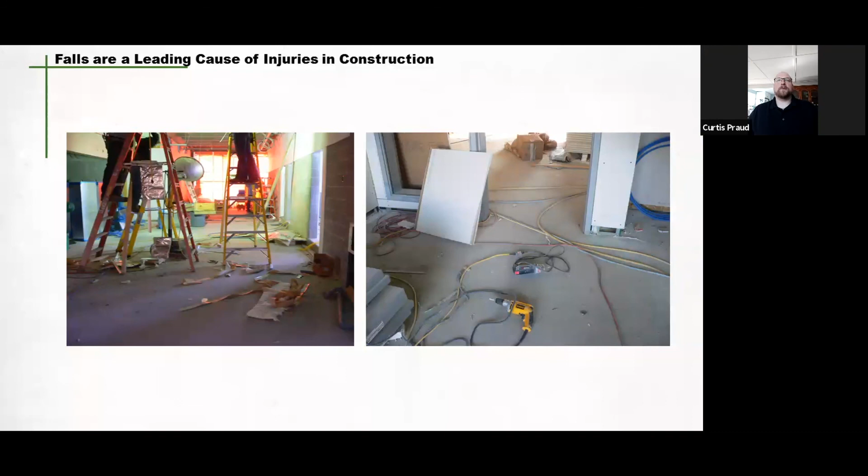So falls from the same level, I touched on that a little bit earlier, and that results from poor housekeeping, holes in the ground, slips and trips. So when we look at that, housekeeping is a big factor. But when we look at falls from heights in the residential industry, without the proper controls in place, they can cause serious injury or even death.

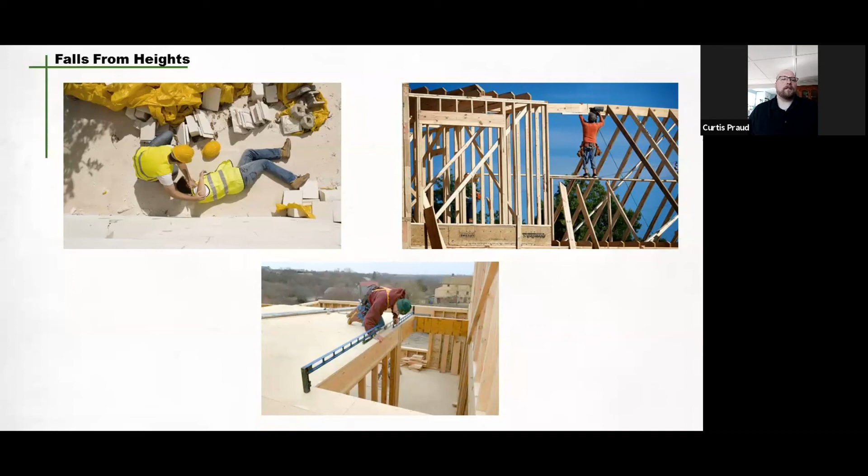So the key part of maintaining workplace safety is understanding what areas pose these risks. So when we look at that, we look at unguarded edges, rooftops, openings in floors, working off ladders. Those are just some examples of working at heights and having those fall hazards. So when we look at that, we want to address that.

So like I said, falls from the ground level, we can look at that as uncapped rebar or nails sticking out of boards and other similar protruding items that can cause injury. Good housekeeping on the site is very important for this reason. The job cleanup phase takes about 5 to 10 minutes throughout the day.

So if you shut your crews down a little bit earlier and give them that time to clean up, you're eliminating quite a few hazards on that job site alone. So it's such an easy task to do to eliminate the risk of your employees getting hurt. It just kind of pays for itself in the end, really.

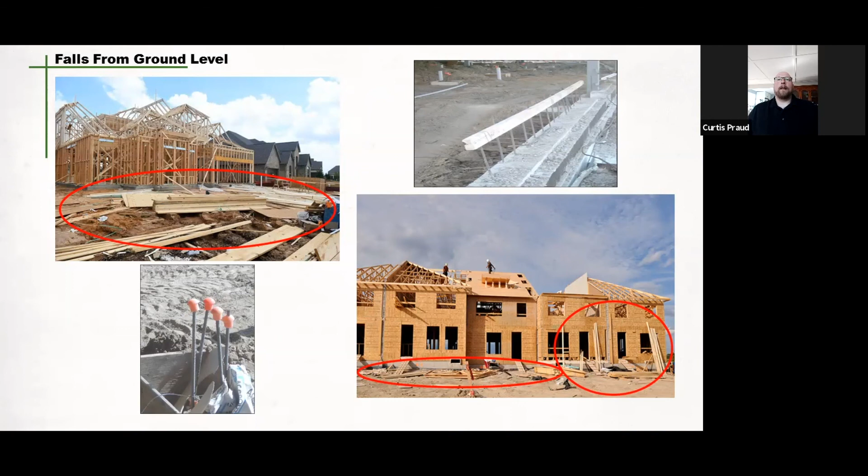And then from there, we move into the hazard assessment process. So most companies are conducting hazard assessments typically on a daily basis, but that'll be determined by your activities at work. So by contacting an advisor, we can help you with that process.

All workers must know the hazards present on the job site, as well as how they can be controlled to keep themselves safe. All hazards or situations that can lead to falls must be assessed and controlled. As with all hazards, fall protection must start by considering the ways of elimination to reduce the risk of falls.

So from there, we move into the hierarchy of controls. So first and foremost, if you have a hazard on site, the best way to control that hazard is by elimination. So just taking that hazard completely out of the picture. From there, you're moving into substitution. And substitution, that's where you're replacing the hazard with something less hazardous, if you can do so.

Next is engineering controls. The hazard's not eliminated, but the risk is reduced by isolating the workers from the hazard. Okay. And then we move into administrative. That's where you're taking stuff into play, like your work practices, your safe job procedures, your training, and changing the way the work is done.

Okay. And then of course, your last line of defense is your personal protective equipment, your PPE. So that should be your last line of defense. Not only that, your PPE can be used in conjunction with other methods of the hierarchy of control.

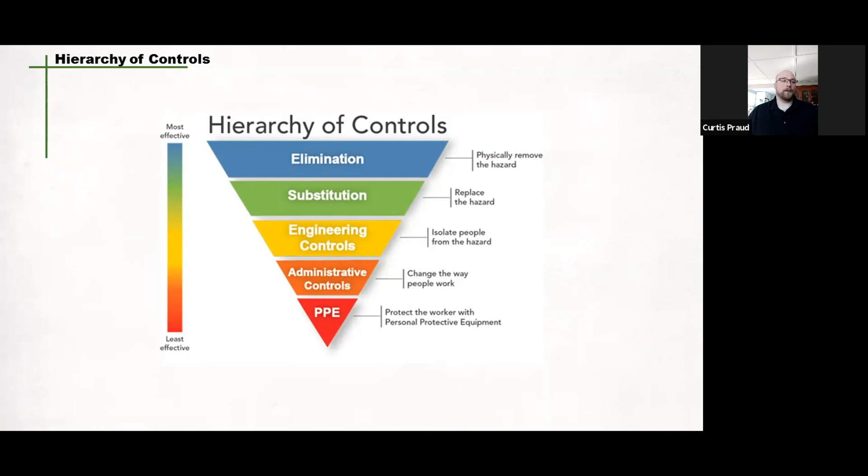So with the hierarchy of control, obviously elimination is the main one. But when we move down the ladder a little bit, we look at the elimination phase and reducing the risk of falls while trying to install them at heights. Okay, so like this, a lot of companies are moving into building the roofs on the ground, eliminating that fall hazard altogether, hiring a crane, and then they crane that roof into place.

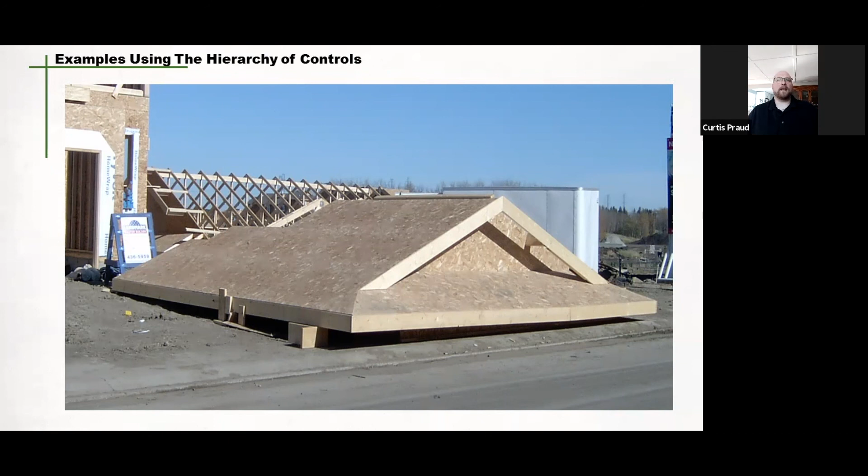Now, with that, you are introducing new hazards, but they're easily controllable with control zones around the site, proper spotters, having that person trained in rigging and stuff like that. How to do that job safely comes down to training. So ultimately, like I said, reducing and eliminating is the key factor of the hierarchy of control.

So the engineered controls, this is a broad category in residential construction. There's so many different methods that companies can use when it comes to engineered controls. Some of these examples are the guardrail systems to protect workers from falling from heights, hole coverings, temporary handrails on stairwells, fencing around the job sites to protect the public, like you can see in some of these pictures.

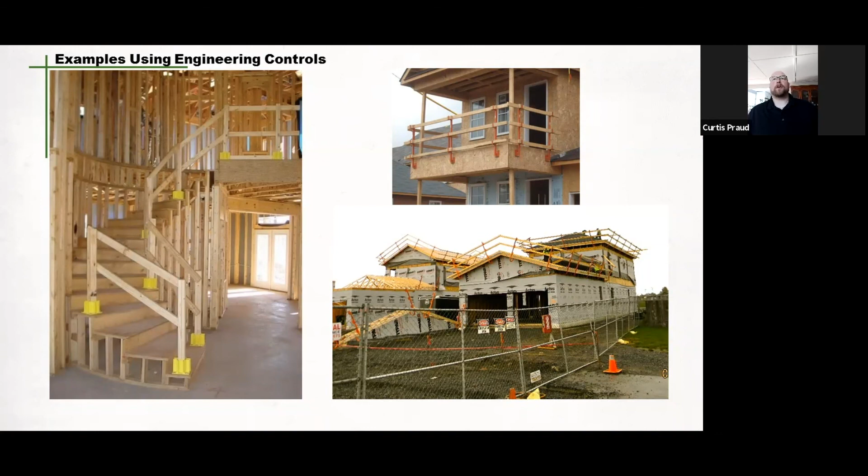There's so many different methods that we can use when we look at the engineered control factor. And with those examples, it's a task-specific control you're going to put in place. They're not all going to work together. So some more examples of engineered controls. A lot of the times we hear, well, how am I going to tie off to the rafters when I'm standing them? If they fall over, I'm going to go with it. So there's so many different methods out there. And please contact the SCSA if you'd like some more help with this.

But one of the avenues you can use when standing rafters and things like that is the wall walking scaffolds. These brackets are attached to either the inside or the outside of the walls and give the framer or contractor the ability to place and stand trusses from a safe platform.

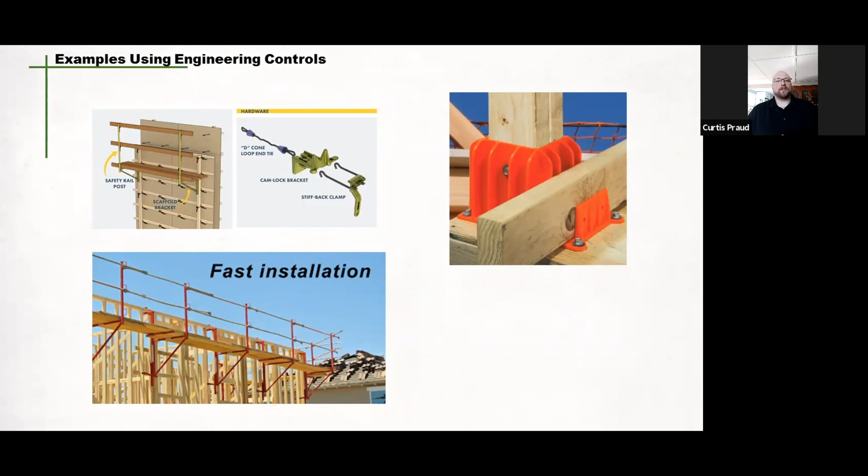So as you can see from that picture there, you can actually hang these brackets on the outside of the wall. It gives you a safe working platform, as well as your handrail and toe kick to be put in place. So they are commercially available. You can also get the guardrail boots. These are a small little plastic piece you can bolt to the floor, and they give you the ability to place a toe board in there, as well as your handrail to be put on.

Also, some other things to consider are your hole coverings, barricades for open holes, to protect the workers from falls. The hole covering is required to be able to support 360 kilograms per square meter. It must be properly secured and marked with a warning sign. Building shafts must also be covered with a 2-meter high solid barrier and clearly marked.

So when you look at building shafts, that's your elevators and your conveyor belt shafts and stuff like that. Those things must be covered, not with just a handrail, but a full 2-meter high covering, plywood, and then secured properly. Put in place.

Now we'll look at a few different pieces of equipment when it comes to ladders and scaffolding on site. So ladders are kind of the most common thing you're going to see on construction sites. There's a few different types of ladders that you will see. You're going to see extension ladders, step ladders, and construction ladders.

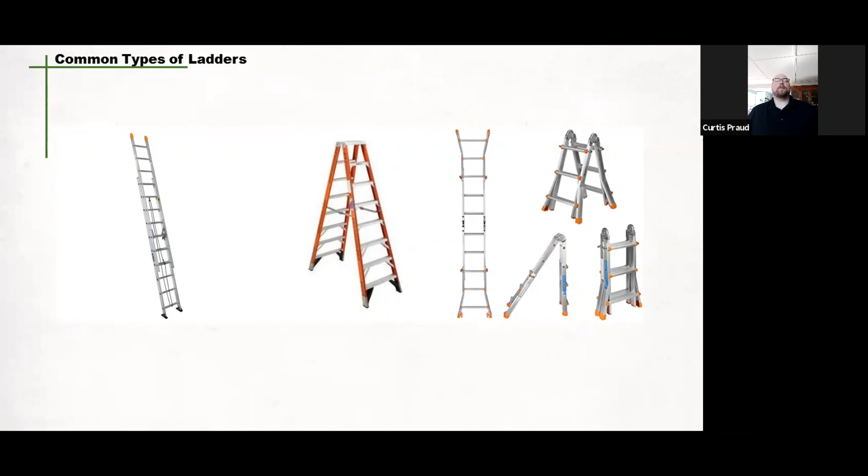Okay, a construction ladder means a ladder that is built on a work site. There are very special requirements on their design and construction in the regulations. So if you are building a construction ladder, make sure you're referring to your legislative requirements, as well as how to set that up. Setting up a step ladder is very crucial in ensuring workers are capable of using them safely.

Okay, so a few helpful tips when setting up extension ladders. Inspect your ladder before setting it up. Look for any bends, loose rivets, safety decals that might be missing or worn off, and make sure the feet are planted and secured on the ground properly. Extension ladders should also be set up at a 4-to-1 slope. So 1 foot from the wall for every 4 foot of ladder, as you can see on the diagram here, and it must be 3 feet above the top landing that you're going to be accessing from that ladder.

Ladders must be secured against accidental movement. The best practice is to tie the ladder off securely at the top and bottom of the ladder, and also refer to manufacturer's specifications for the specific design of that ladder. Are there any electrical hazards? If there are, avoid using the ladder in that area. Try and relocate that ladder to a safer location as means of access.

Are you blocking any doorways? Okay, so never set a ladder up in a doorway. If it's set up in the doorway, somebody flings that door open, they're going to hit that ladder, and you're going to take a tumble from a height. So a 2-section extension ladder must have 3 foot of overlap, so it cannot fold inwards. That's very important, having that 3 foot of overlap on those extension ladders.

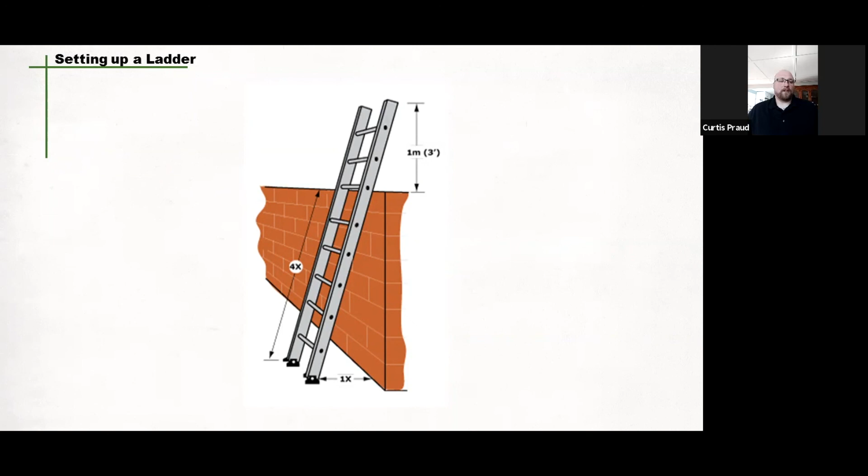Being a big guy like I am, I need to look at that stuff. I can't just grab a little tiny step ladder and use it. I got to make sure that that ladder is going to support my weight. I am a journeyman scaffolder by trade, so I learned this throughout my career in scaffolding, and weight restrictions were very important. I had to be conscious about that. Nothing to be ashamed of. You must do it. Your life is in your hands at that point when it comes to fall protection.

So moving a little bit more on ladder safety, there are several practices that make ascending, descending, and working off them safe, okay? Ensure that 3 points of contact are maintained at all times while climbing up and down that ladder.

While working off a portable step ladder, ensure that you're standing no higher than the last two rungs, okay? So ideally the third last step on that ladder is as high as you can go. With that, if you are using your hands for working, keep your torso in line with the ladder. If your belly button's touching the ladder and you rest your hips on that ladder, your hips are now considered your third point of contact, giving you the ability to use your hands while working. But like I said, keep yourself within the parameters of your ladder.

Carrying tools and supplies up the ladder will prevent you from maintaining 3 points of contact. So when you do have to carry stuff up a ladder, don't. Utilize a rope and a bucket. Have people in place that can help you do this stuff properly and safely. Do not carry stuff up the ladder in any way possible.

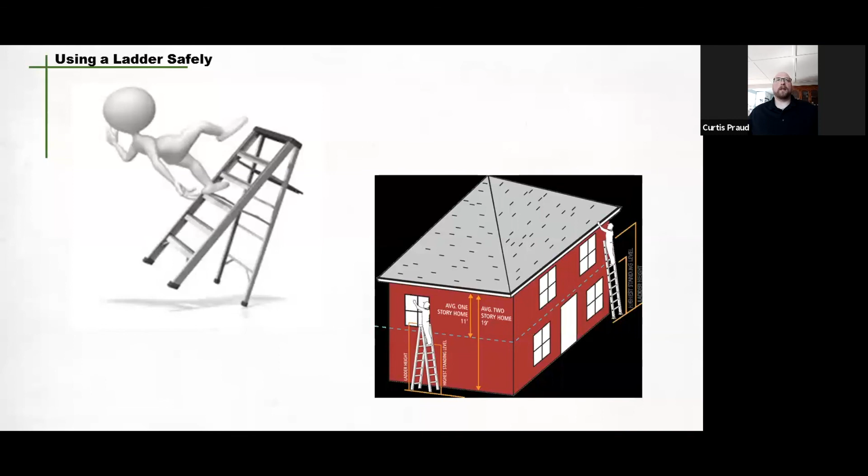And do not use a folding step ladder in place of an extension ladder. This is something we see all the time on residential construction sites, where they'll take a folding ladder and set it up outside the house. It is not designed to do that. Those legs can kick out from underneath you, sending you falling to the ground. So again, placing and choosing the proper ladder for the task is key.

So moving into scaffolds, scaffolding is a huge aspect of residential construction. This stuff is amazing. It speeds up the process for a lot of contractors. But understanding your scaffolding and how to use it is crucial. There is training that should be taken before using scaffolding, as well as referring to the manufacturer's specifications on how to set this stuff up.

A few different types of scaffolds that you can potentially see on residential construction sites are your frame scaffolding, which is the blue ones in the picture. Then you move into system scaffolding, which is the top right scaffold. And the bottom right scaffold is tube and clamp scaffolding. They're very common in residential construction, as well as pump jack scaffolding. A lot of times siders and contractors installing windows and stuff will utilize pump jack scaffolding as well.

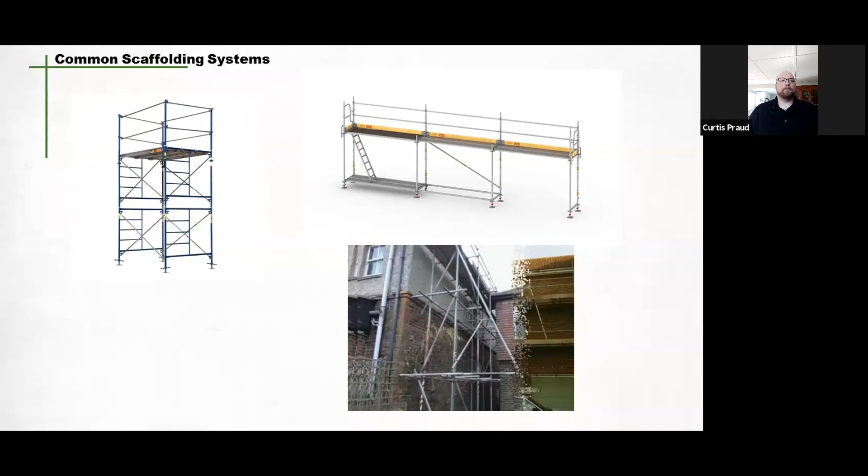Although scaffolding is very common on residential sites, there are risks associated with them all, okay? So just to discuss a few requirements, scaffolding needs to be erected by a qualified, competent person, and it also needs to be inspected daily. Like most common equipment, scaffolding has weight limits, okay? Weight limits for people, material and the equipment on it. The specifics of the system must be adhered to. So whatever the manufacturer specification states, you must stay within those guidelines, as well as referring to your legislative requirements.

One example is when a scaffold is covered in hoarding, an employer or contractor should ensure that all scaffold components and tie-ins are adequate to support the load that may be placed on the scaffold as a result of wind or weather conditions. A lot of people don't know that. They just wrap a scaffold in hoarding and they don't tie it in at any points. You've now just created a big kite of scaffolding. And as you can see in these pictures, that's a good possibility of what happened here.

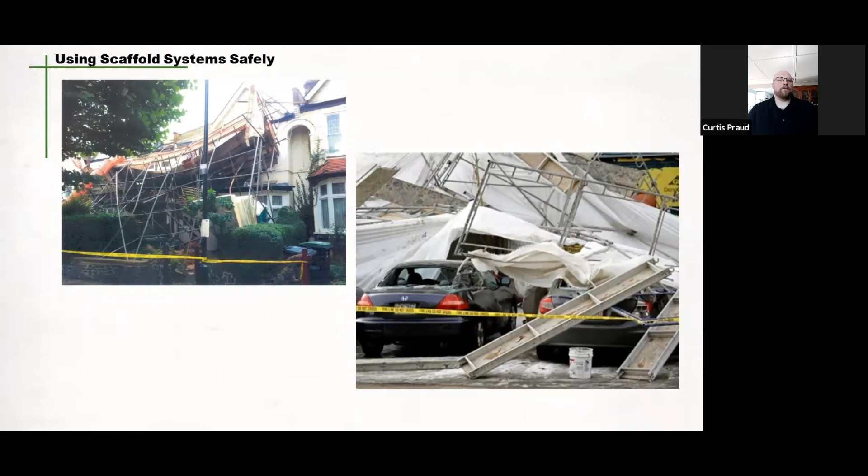They wrapped this scaffold in hoarding, and all it takes is a wind to get in behind that hoarding, and that scaffold is gone like popsicle sticks. It'll just take off with the wind. So ensure that there's adequate tie-ins and all the components are supported properly for their loads, and, like I said, that you're trained in the use and following manufacturer specifications for scaffolding.

Regulations and responsibilities. Employers are responsible to ensure the safety of their workers when working at heights. They are also responsible to ensure that workers are trained and aware of the risks associated with the tasks being performed. All work parties have shared responsibilities to ensure hazards are identified and control strategies are put in place. So when items are deficient, good communication between subcontractors and general contractors is important to mitigate the risks on site. So communication is key.

If we look at section 116, protection against falling, it states that an employer or contractor shall ensure that a worker uses a fall protection system when a worker may fall 3 meters or more, so 10 feet, or if there is a possibility that a worker falling less than 3 meters could be injured. Okay, so if there's any protrusions or any hazards less than 3 meters while that worker is working at heights, you should have some sort of fall protection in place.

So what does this mean in the workplace? Employers need to ensure that the work is planned, adequately supervised, and supervisors are trained in the use of their fall protection equipment. So ensuring that equipment such as ladders and scaffolds are maintained and safe for use. So then that's when we come down to your hazard identification and controls and that hazard assessment process. You're going to talk about this stuff while you're conducting that hazard assessment, and then coordinating with everybody about the controls so everybody has their input in those controls to keep them safe.

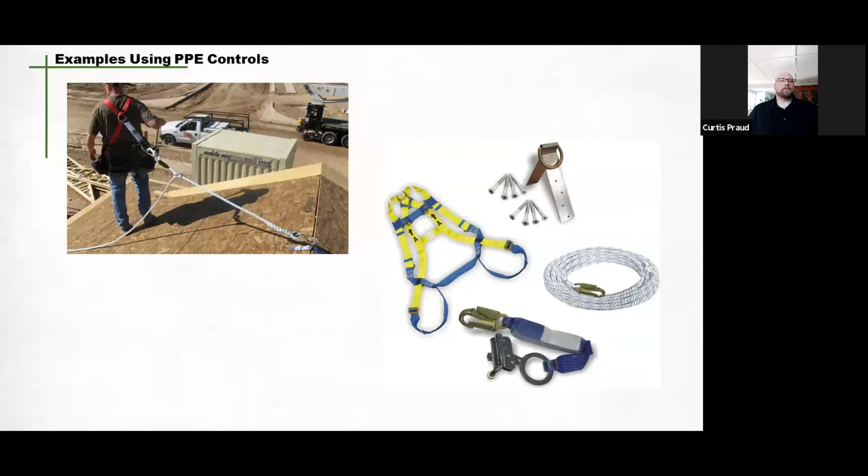And again, like I said, PPE is your last line of defense. So with that being said, it is also the most common method used to protect workers on residential sites. So ideally, they should be using other methods of control. However, this is not always possible. There are many variations of fall arrest systems out there. Workers must be trained on their use and limitations. So like I said, each piece of equipment does have certain limitations, and knowing those is important, as well as calculating your clearance distances.

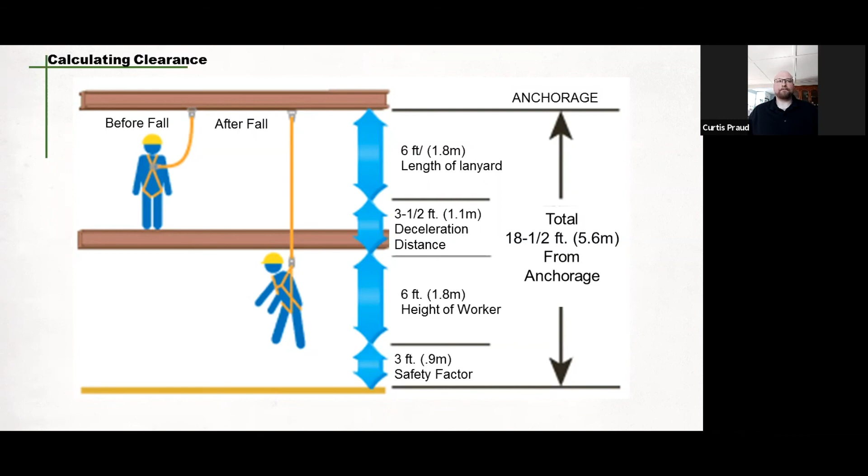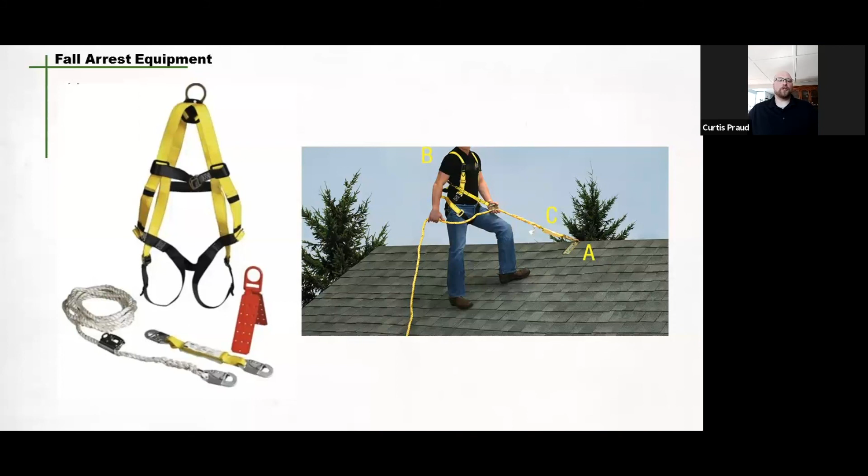The anchor point that a worker ties off to must have enough strength to withstand a fall. So OH&S regulations dictate that an anchor point must have a breaking strength of at least 22.2 kilonewtons or 5,000 pounds if used in a fall arrest situation. In residential wood framing construction, a 5,000 pound anchor point is not always possible. Obviously, you're tying off to wood, potentially 2x4s and 2x6s. In these cases, it is best to use a travel restraint system when you can. This will prevent a worker from getting to a point that they can fall.

And this anchor point must withstand up to 2,000 pounds if a permanent installation and 800 pounds for a temporary installation. So greatly less pounds to be put towards that anchor point if you go with a temporary travel restraint compared to an anchor point for fall arrest, which is at 5,000 pounds. Temporary installation of a travel restraint is only 800 pounds. But I can't emphasize enough that 800 pounds is temporary and it's for travel restraint, not fall arrest. Okay.

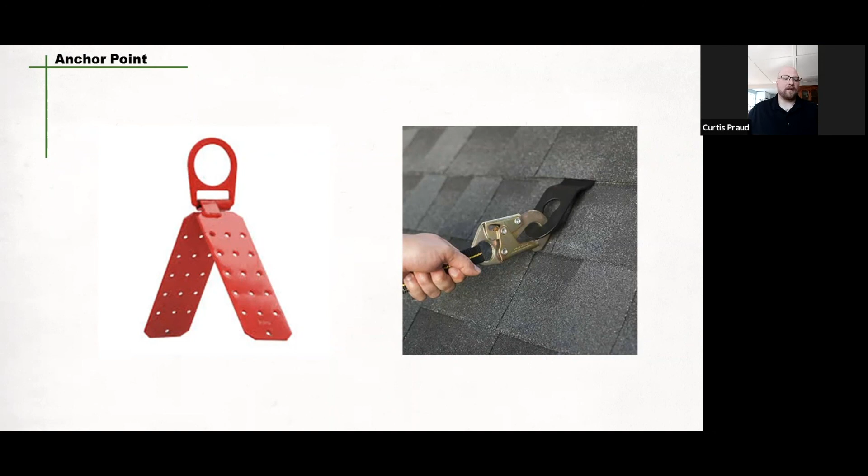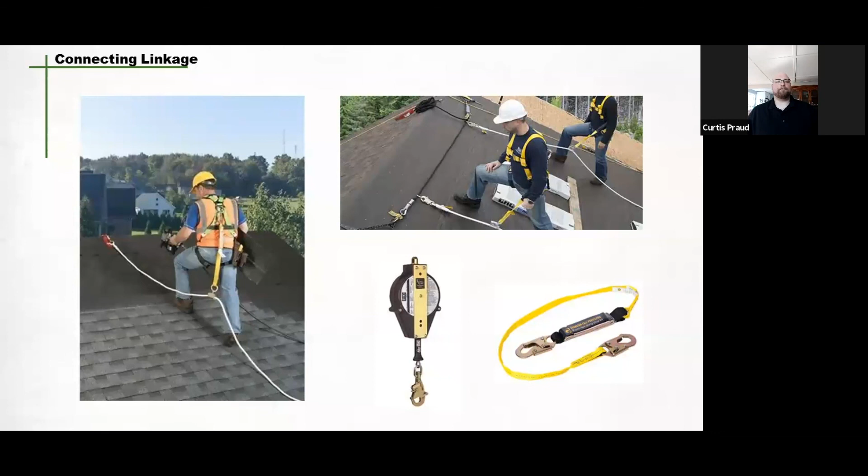Then you look to the right there, and you'll see there's actually a dual purpose or a dual worker lifeline set up there. And then you move into the self-retracting lanyards, and then of course your shock absorbing lanyards, the yellow lanyard there. Then we move into harnesses.

When it comes to harnesses, we really want to look at the fit, care, and use of this harness, as well as the training. These devices are to be maintained as per manufacturer's recommendations and as per legislation. The legislation states that the worker must be trained in their specific fit, care, and use. So when we talk about fit, the proper fit of your fall protection equipment is very important in how it will perform in the event it is utilized in a fall.

If your harness does not fit properly, it can result in extreme bodily damage or worse. Your harness should fit like a snug winter jacket. You should look at the weight ratings of that harness and make sure it's correct for the user's weight, as well as taking into consideration that worker's clothes and the tools they have on them. Some guys walk around with an added 50 to 60 pounds of tools on them. That could greatly affect how that harness is going to perform.

Okay. Then we look at the care. Like any PPE, fall protection should be formally inspected as per manufacturer's specifications. And it's a good idea to visually check that harness before each use. And then knowing how your fall protection equipment works and how it is used in the proper way is very important. You must follow manufacturer's recommendations again, as well as your company's safe job practices and safe job procedures when utilizing and using your equipment.

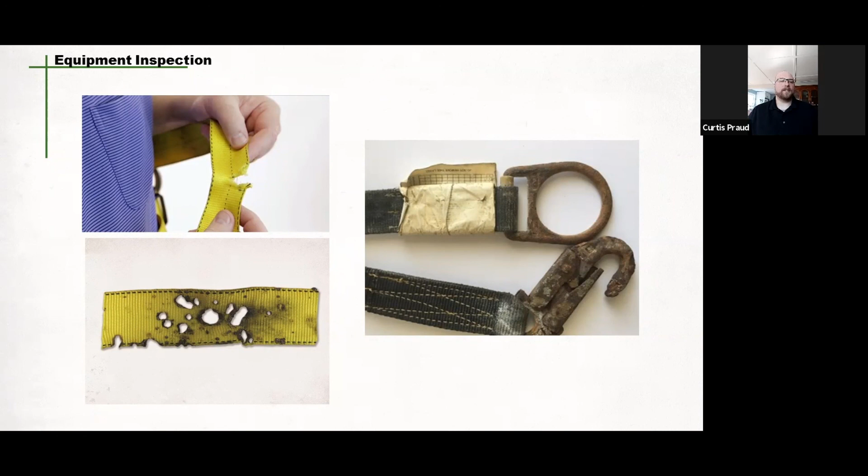So then regulation 116.1 states that an employer or contractor shall develop a written fall protection plan where a worker may fall 3 meters or more and where workers are not protected by a guardrail. Okay, so some aspects of that fall protection plan: the hazards associated on the work site. And then we look at the fall protection system to be used at the work site.

Then we see the procedures used to assemble, maintain, inspect, use, and disassemble the fall protection system, and the rescue procedures to be used if the worker falls and is suspended by a personal fall arrest system and needs to be rescued. Okay, these plans also must be readily available on the job site and specific to the site and its hazards.

Workers have to be trained in the fall protection plan prior to working at heights. The SCSA does have fall protection plan samples and a complement of advisors to help customize these documents as needed for the specific company. So if you need any help developing these plans, there are set guidelines, like I just listed in regulations, as to what is supposed to be on these plans. If you have any questions or concerns, please get a hold of an advisor at the SCSA and we'd be glad to help you out with that.

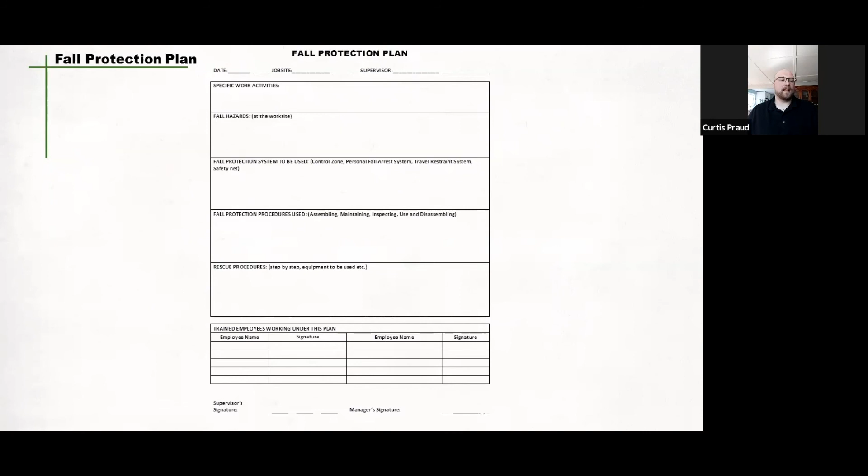In conclusion, the residential industry faces many challenges to protect their workers on site. However, with proper training and information, the degree of risk can be greatly reduced or eliminated. So good communication in the planning phase of the job can set up success for all contractors. Discuss the safety requirements on each phase of the build, and determine the best controls to use to maximize productivity while ensuring work safety for other contractors on site. Planning ahead can ensure the work is completed on time and on budget with zero injuries.

Very important: involve your workers. Let them know that their safety is important. Ask for their input, listen to them and their concerns, and hold them accountable. Give them the chance to talk. Give them the ability to speak their concerns, and not only their concerns, but if they have a good idea, listen to them. Everybody's voice matters, especially when it comes to safety. The SCSA advisors are available to assist companies in understanding the regulations and requirements around protecting their workers at heights.

Again, thank you. And one last thing, safety doesn't stop at work. We need to take this stuff home at the end of the day as well. For example, we need to set good examples for our children and young workers coming up in the trades. So important. It all starts with us and then it moves down the chain. If you have a neighbor watching you, or your young niece or nephew or family member watching you, and they see you working at heights not tied off, they think that's the norm. They think that's okay.